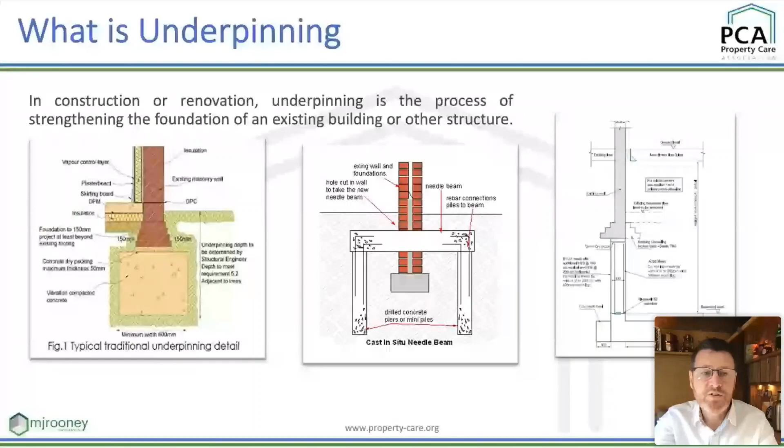So why would you underpin? So we've got building foundations movements or subsidence. Maybe you want to add another story onto a building and you need stronger foundations, forming a basement, of course, which we like to do. Or maybe you're putting a pipe down the side of a building and you're in danger of undermining that structure to get the pipe in. So you might want to underpin that building first of all.

So I got these from Hamilton Fraser. These are really good little images just to explain it. So heave when the ground is pushing upwards. And if you look at the cracking on that photo there, you can see it's wider at the bottom, narrower at the top, and it gives a clear indication of the direction of movement. With landslip as well, you'll normally see a building on a sloping site, and you can kind of see that building moving towards that slope, bigger cracks at the top, smaller at the bottom.

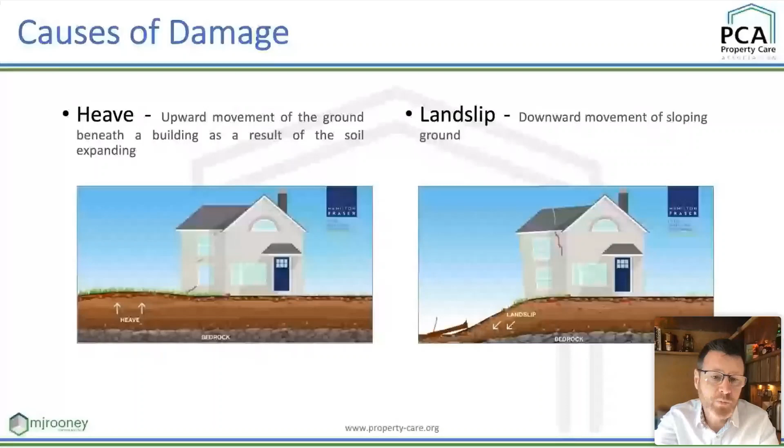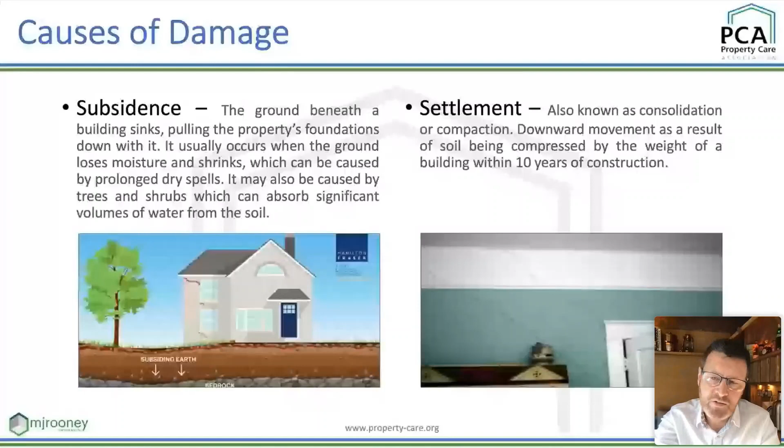Subsidence, as you'll see here, so I think that that tree would have something to do with what's going on in that building, but you wouldn't really see it in the ground itself. And settlement, you would hope you're not underpinning for settlement, so new buildings would always move a little bit, but you'll hope they're designed and built to a good enough quality that you shouldn't see that cracking. Or if it is, it's just minor cracking in the first year within the structure for drying out.

No need to underpin, and just like this one here, this is a lintel failure. It could be coincided with the sort of failures you'd see for subsidence, but if it's just an arch like that, you just need to rebuild it. Certainly no underpinning needed in place.

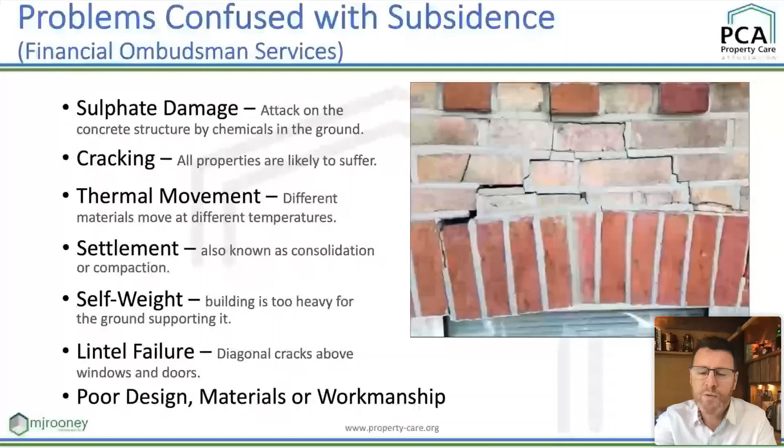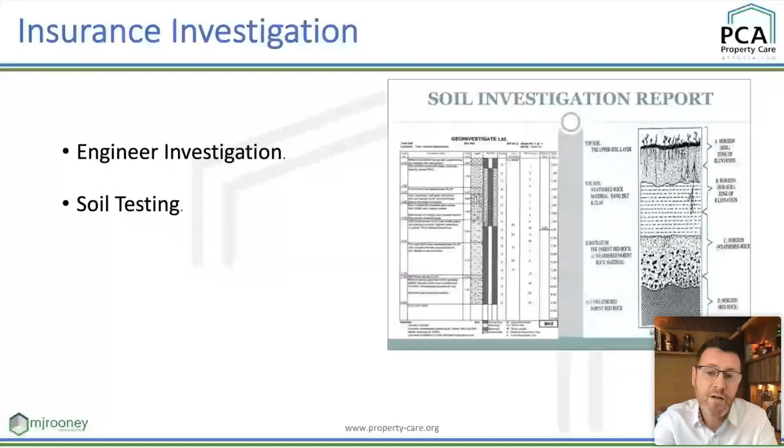So when I was working at Ellis and Buckle, and that became Cunningham Ellis and Buckle while I was there, these are the investigations that we would always be doing. An engineer would have a look first and see, does it look like subsidence, the crack profile. We do soil testing to see the type of soil. Is it clay, highly shrinkable? You might find roots in that, and you'd send them to the lab to know exactly what trees they came from. Arboricultural report to see the trees, what size they are, is there more growth left in them trees?

And drain testing, of course, because in a lot of cases you'll have a look and you've got leaking drains. That can be softening the ground below the foundations, but also washing out the fines out of the subsoil. So maybe if you put a drain liner in there, that's your solution. Certainly not getting into underpinning in that case.

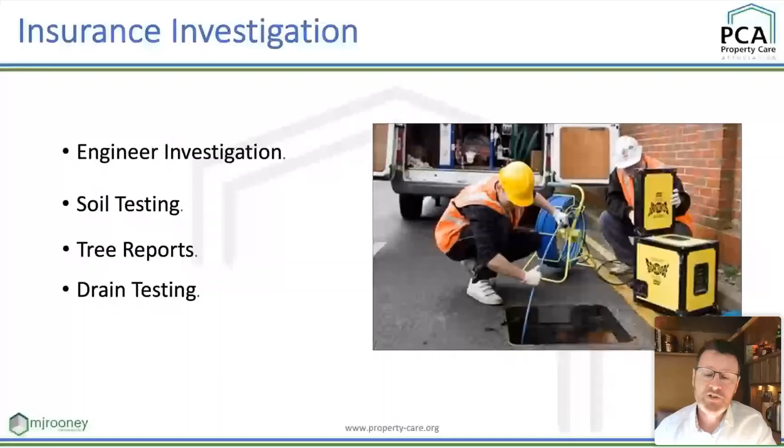Particularly in very long, hot summers, you'll see more damage, more insurance claims coming up in those kind of instances. And then during the wetter seasons, you'll see if you're monitoring the cracks on that building, they'll close during the winter time. And that's a clear indication it's the trees.

So before the invasive weed group get hold of this data and put that on the list, if you just manage those trees, or if you just pick a different type of tree to get you that privacy, maybe wait a little longer, it might be a much more sensible approach.

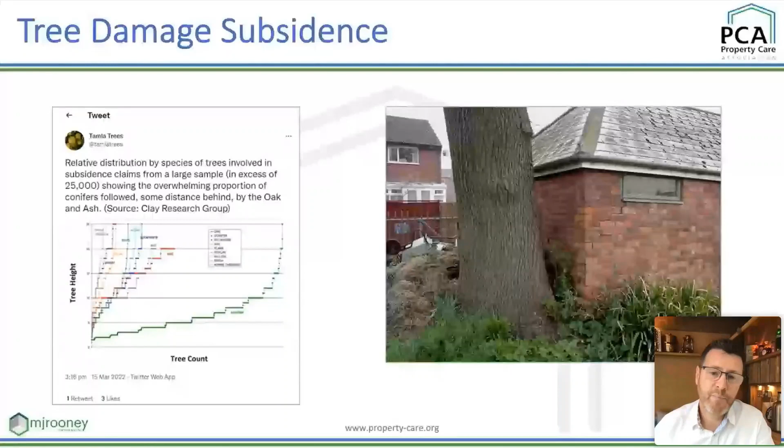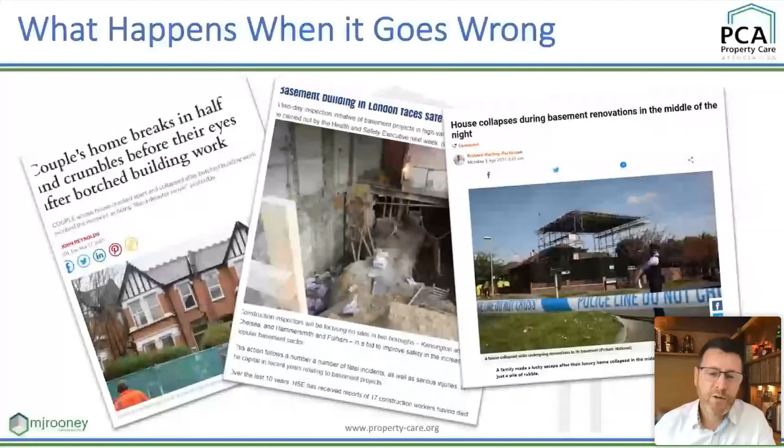And that one on the right, I believe that was not just one house, but two apartments. You've got an upstairs and downstairs. Downstairs want a basement. Upstairs probably didn't want them to build a basement, and the contractor that they selected obviously hasn't done their job right. They had a right to support, a legal right to support, which was gone. But you want to make sure that your contractor has the insurances in place, which I don't believe is the case in this one, just to make sure that you're protected like that.

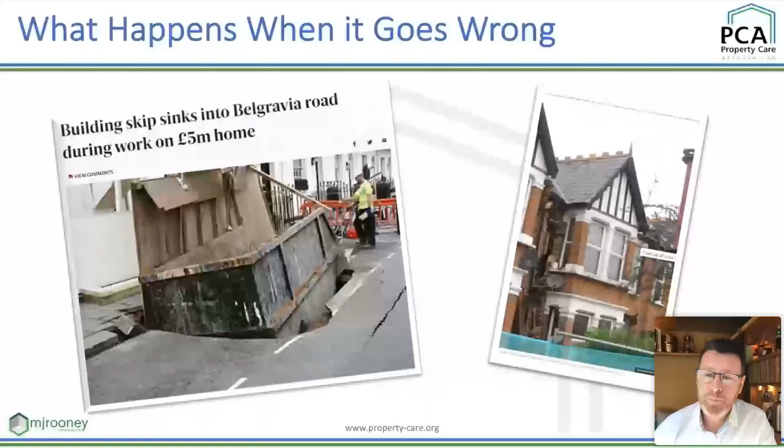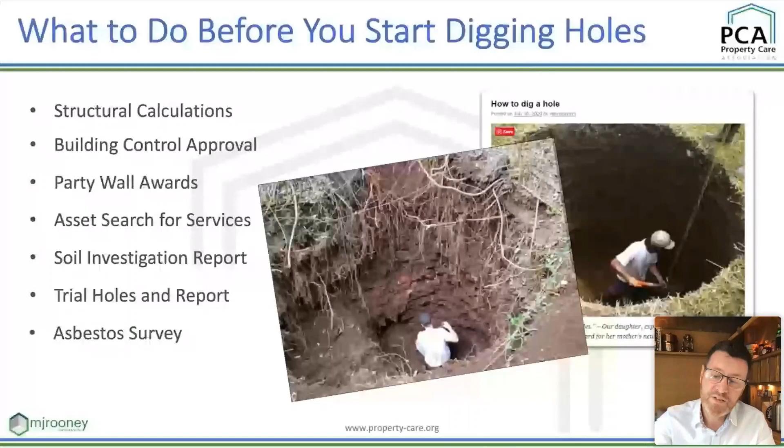Soil investigation reports, of course, trial holes, maybe an asbestos survey for pre-2000 buildings. A structural survey to make sure the underpinning itself is going to be safe to do, that the buildings are okay for that. You've got unexploded ordnance, particularly lots around London, listed structures, archaeology, all the health and safety and temporary works procedures and setting out sequences that we need to do.

Now, that guy that you see there in the picture, obviously all of this health and safety doesn't apply to him because he's in the Congo, but he is part of our supply chain. And I think we've got a responsibility to make sure that the steps that we're putting in place for ourselves over here go into our supply chain, and we may end up just paying more for what we need. But that cobalt, ironically, is to make the tools that we need to do our job safer. It's for our mobile phones, it's for our EVs and stuff like that. So we've just got to keep up our responsibility on that into the future.

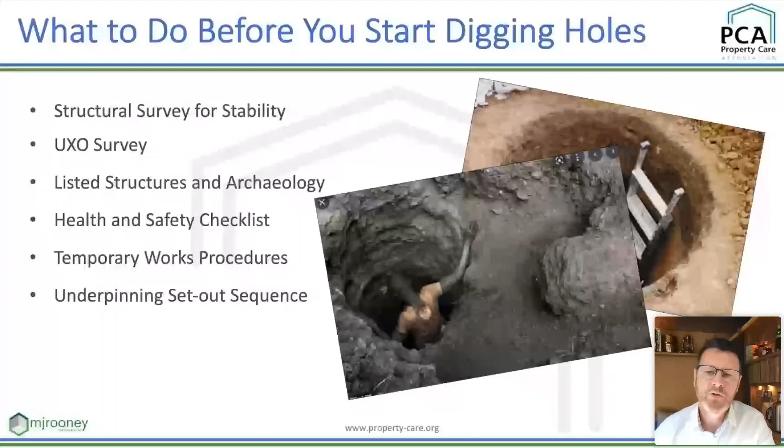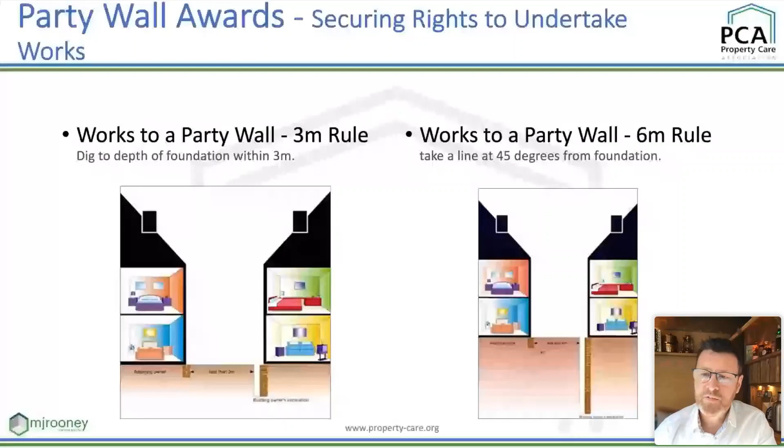But we've seen cases where there's blocks of flats and they're all under individual ownership. So you could have 40 party wall awards. Is that 40 party wall surveyors? I suggest that that surveyor is working on behalf of the wall and not for either party. So if they're doing their job right, you should only really need one party wall surveyor, I think, in most cases.

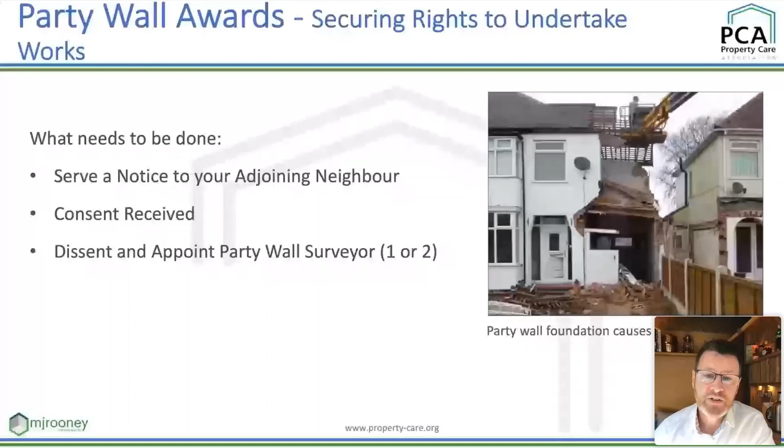So we send a signal down through the services and we'll locate them on site. So the first thing we want to do is a hand dig. Find them services, log them in a couple of locations so we've got a reasonable idea of where they're going, and keep up that checking as we're going through that process.

Another thing to note is doing trial holes. Some jobs go ahead and we don't have the information on the trial holes. I think it's awkward to go into someone's house while they're living there and dig holes, but it really is worthwhile. Certainly lots of holes, one on each elevation, I think is advisable.

We've come across jobs before where you start to do the underpinning works to form a basement or something and you find out the foundations are completely different. So the engineer needs to revisit their scheme. We need to revisit the temporary works, and you need to go back to that party wall award. So you can get huge delays that would come out of that. So as much information gathering as you can right from the beginning.

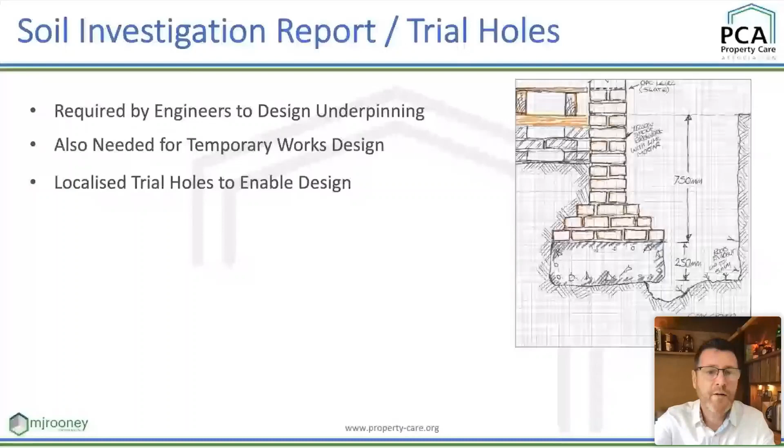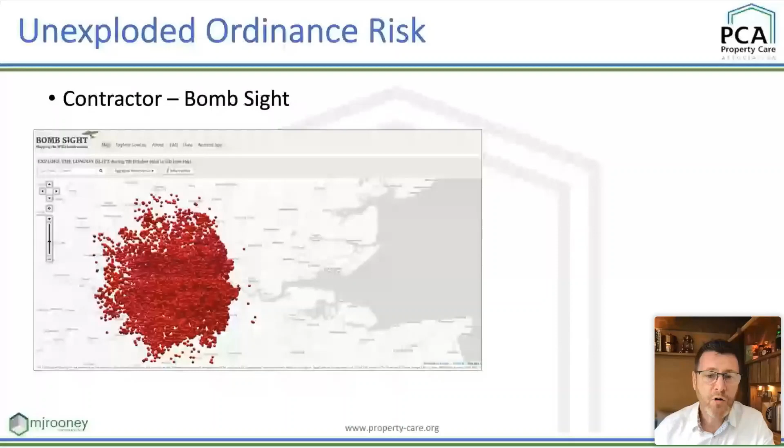Right, bomb sight. This is a really good website that you can go to. So there are all the bombs that landed around London in the Blitz. That's just by our office, and I can see about 4 or 5 in the vicinity of where we are. So if I was looking at an underpinning project or a basement build, I would check that website.

Now, if I'm very close to one of them bombs, then there's a good chance that other bombs fell nearby, maybe that didn't explode. Or even if it was very close to that, there would be quite a risk of contamination in that soil. So you might do a little bit of extra testing on that. Quite often, if you get a soil investigation report, there'll be a desktop study that's done with that. So that might identify the risk of unexploded ordnance in the ground.

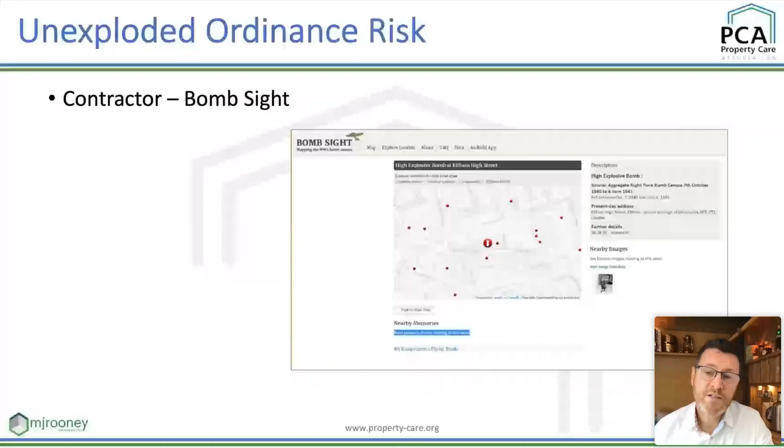And they would just be on site while we're digging. They would just be drinking tea and walking around. But believe me, if you did find one of those devices, we would all be gone and they would be left to deal with that. So it's just all about reducing risk as much as possible. We've never dug up any bombs, by the way, but you do see it in the news.

So a note on listed buildings and archaeology. It's worth checking if a building's listed, but also if you're next door to a listed building, because that can be just the same. And you'll need listed building consent if you want to underpin those buildings. And just to note that if you just say, well, I didn't know, it's not an excuse. You cannot use that as your defence. So you will be committing a criminal offence by doing those underpinning works in that case.

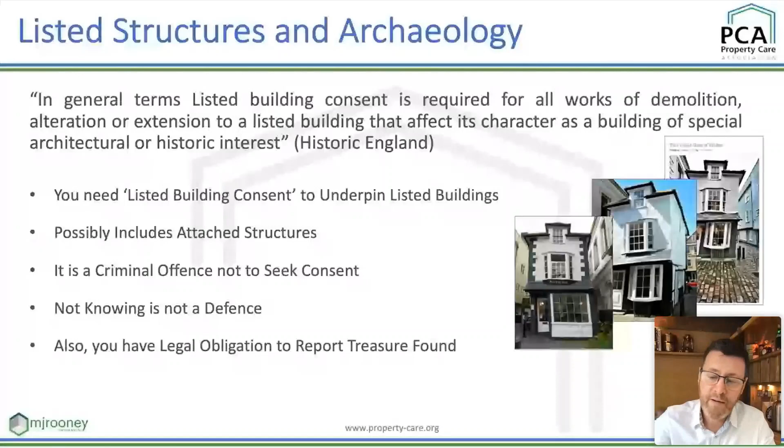Also to note, for treasure that's found or any archaeology, you've got an obligation to report that as well. Now, when I was digging pins years ago, I used to dig up lots of stuff, lots of bottles, particularly when it was around rivers and you had lots of gravels. So we'd find old pipes and stuff like that. Nothing of any real value. I've not heard of anything really reported to me since. No one's come to me and told me they found a box of gold or anything like that, but there is an obligation to report that.

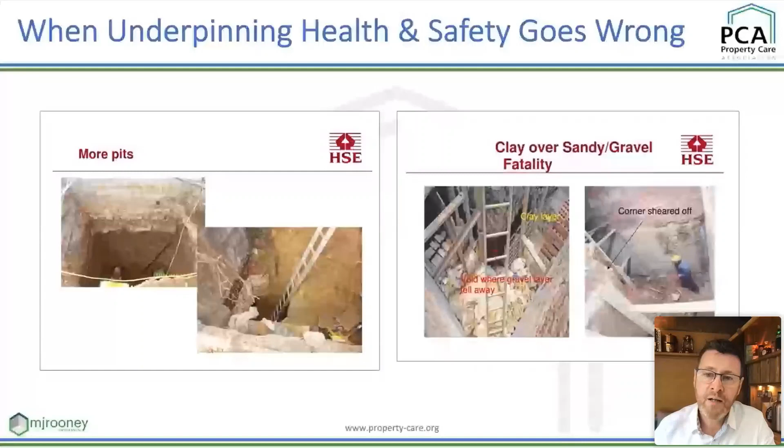So this is the sad side of what we see. If you have a look on the right there, look at that shoring that's in place for that underpinning. And that was a fatality on that site. This data was from the HSE, another fatality site that you see there.

So some people are going to work and they're just hugely let down by their employers, which is just really sad to see and something that we can definitely avoid. That one on the right there, this is the type of thing that can go on.

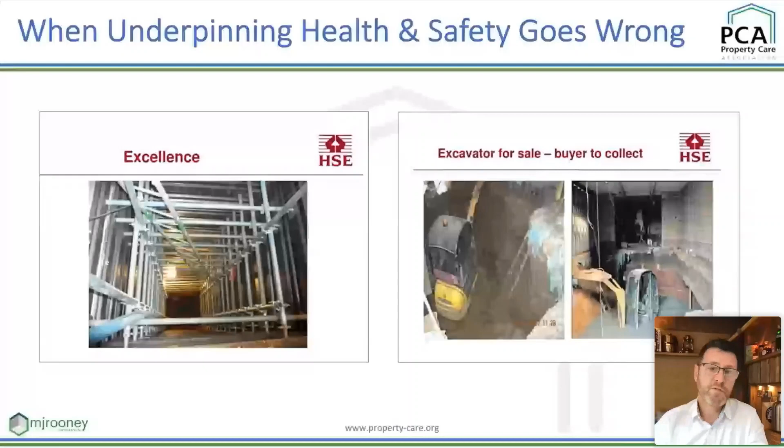So health and safety is everything, obviously, for what we do. So we get some checklists together. We've got to have our method statements and our risk assessments in place. We would have a checklist that has to be compiled at the start of every shaft and every part of works. Strong confined spaces procedures, because we're in those confined spaces, rescue situations, and we would need to have the calculations for all of them temporary works on site.

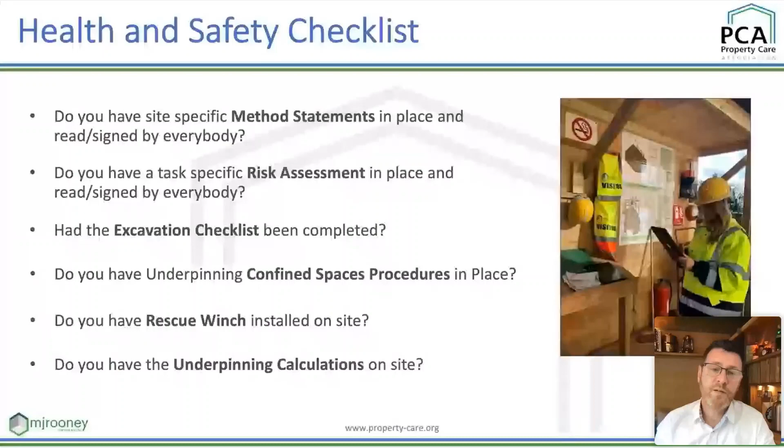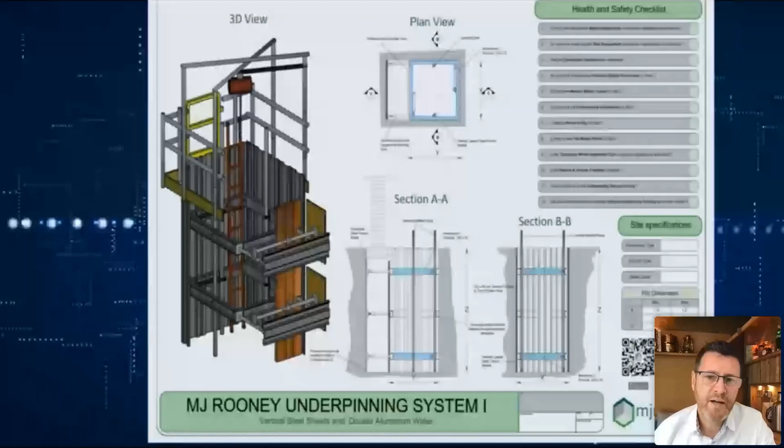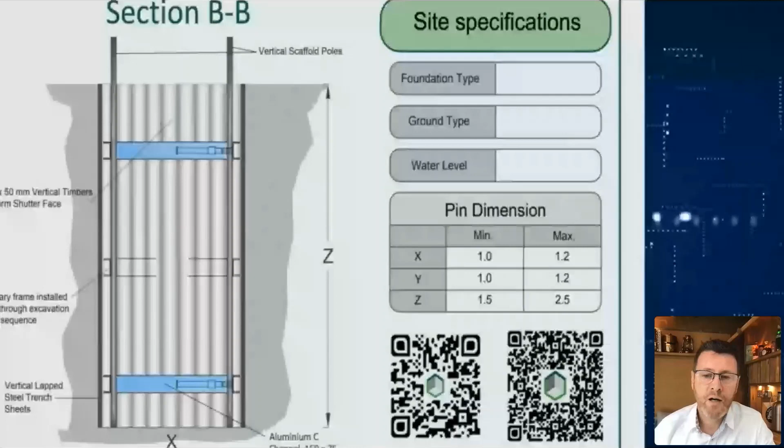So here are the type of underpinning drawings that we have. So we're showing in 3D so that everyone can visualize exactly what it is. We've got the plans, the sections, we've got the dimensions and ground types, but we've also got this health and safety checklist. You need to tick every one of them boxes off on the right hand side before you can break the ground, start excavation. And we've got QR codes which take you to a virtual reality environment, augmented reality environments to see these underpinning systems.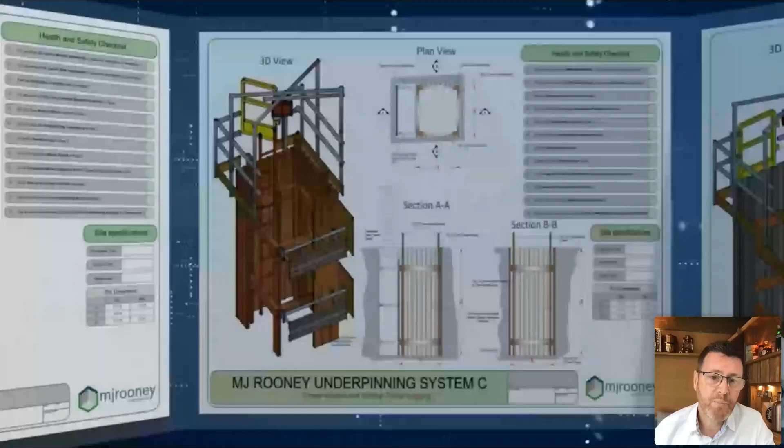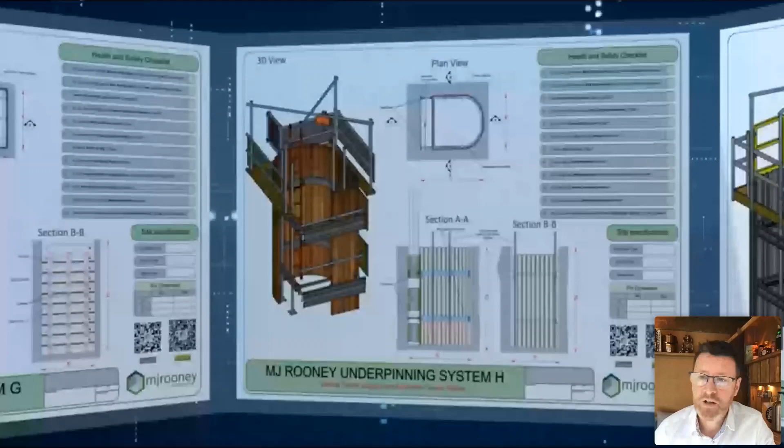So the first one has no earthwork supports in it, just get the concrete in there quickly. We've got just some ply lining for shallow pins again. We've got a timber system for shallow underpin shafts. Now we're moving into steel sheets when we get a bit deeper. We've got steel sheets with steel whaler frames, and you can do double or triple frames depending on where you're going. And then we've got our deep shaft systems, and we've got some innovations that we're looking at for rounding shafts off because it's quite an efficient shape. Systems like that would be for very firm ground.

So lots of different systems in place, but just because we've got a standardization in the types of systems that we've got doesn't mean that you can get away without having a full set of calculations for that exact building, for that exact ground condition. So we need full temporary works design on every job.

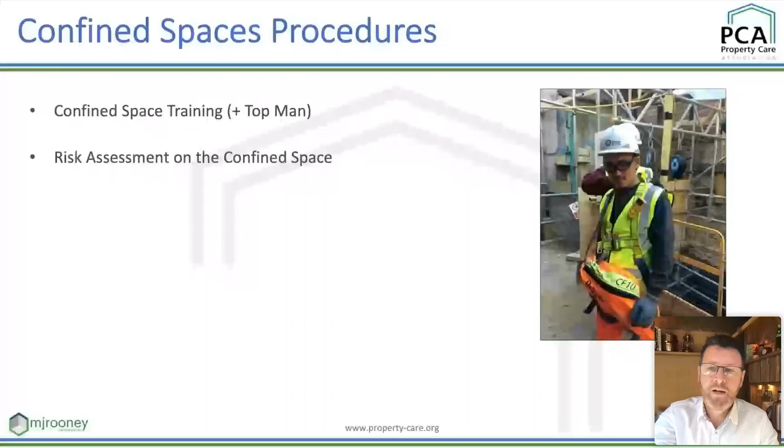So confined spaces training, really important in what we're doing. So risk assessments, looking at the hazards, and you would have a top man in place up on top. He would have rescue breathing apparatus with a little bit more air in it. And what you can see Gigi wearing there, he's got a gas monitor on his lapel. We would tie that to a bit of string and dip the shaft before you get in.

Then when he gets down there, he doesn't have to wear all that gear while he's doing the excavation works. Of course, they would be on the side, just nearby. And when we get down into deep underpins, we keep the harnesses on. And just over his shoulder there, you can see the rescue winch. That is a manual rescue winch.

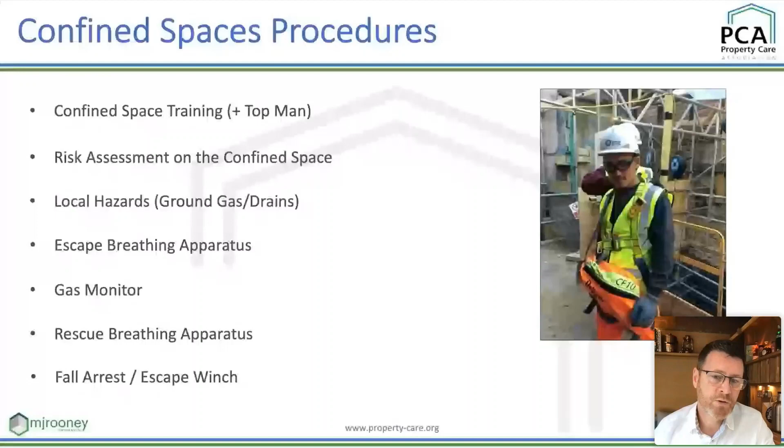We would have an electric winch that's in place, but in terms of if there was a power cut, you would use the manual winch to make that escape. Because there's lots of things that can go wrong in them shafts. You can have pipes that you cut through, and there may seem that there's no water coming into them. And then you get a good storm, and your shaft could fill up with water. You could have low oxygen levels, ground gases in that shaft as well. So lots of risks. With all these procedures in place, we can mitigate them quite well.

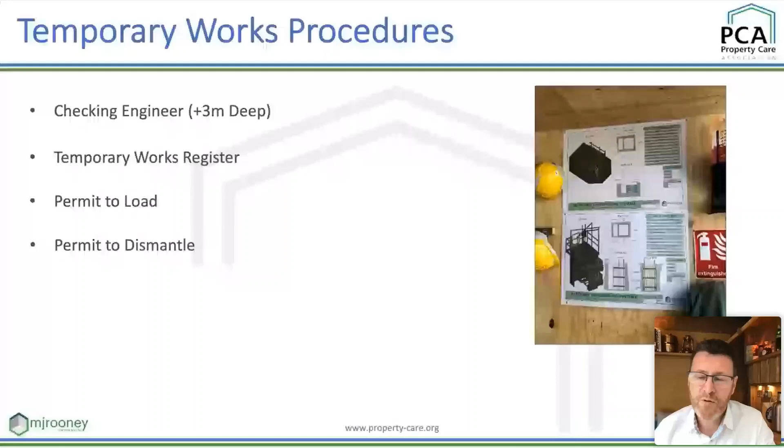So our temporary works procedures must be to BS 5975. We would have a temporary works coordinator and a temporary works supervisor fully trained on every job. Now that's a 2-day course and a 1-day course, but really it's your expertise in your field that is the most important thing. And these courses just really tip you off with the procedures that you need to be following. So if we're getting into deeper shafts, the guidance would say that if you're more than 3 meters deep in a shaft excavation, you'll have a checking engineer.

And then we'd have a temporary works register with every single item of temporary works on that project written on it, showing the calculations. Do we need drawings? Who is the temporary works engineer? Who's taking responsibility under their PI for it? And remembering that permit to load, but also permit to dismantle and a sequence to dismantle, because sometimes that can be the most dangerous bit, is getting out of these excavations and getting back out above ground, and filling in those holes and taking out that earthwork supports.

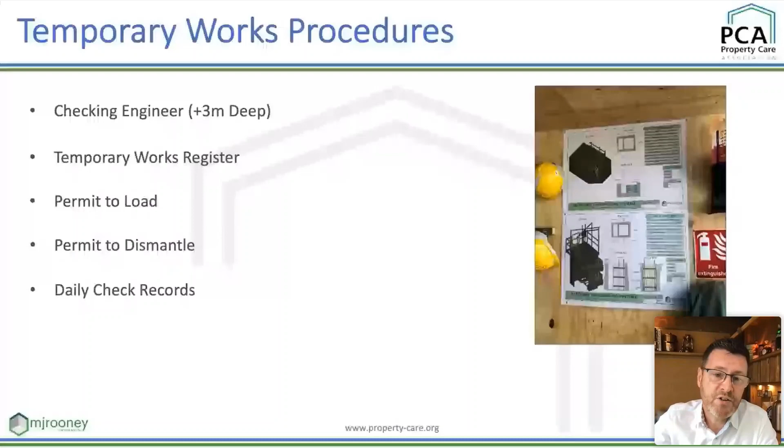So we would have daily records. Them records would be digitalized, and we would have them back at our office so we can make sure that all of these procedures are being followed. So what happens when it goes wrong? There is a person in that shaft there, so I'll just leave that up briefly, but you can see the brickwork fell away. So how about putting in a concrete ring beam around that whole structure there in the first place before you start underpinning the shafts?

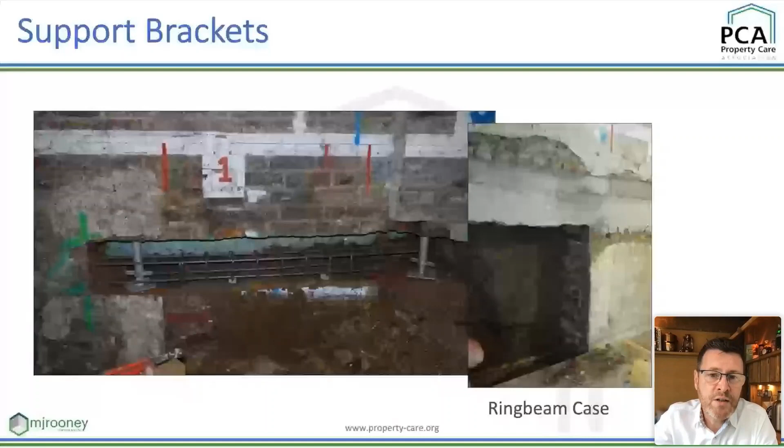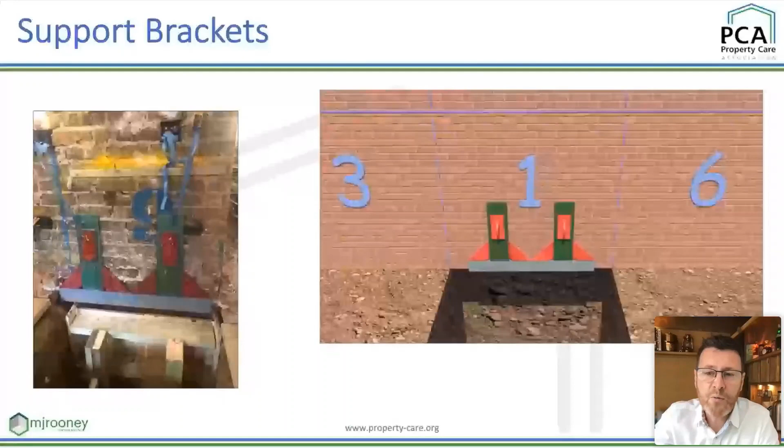We've got some different, this is a steel beam just to hold brickwork in place. And this is a system that we like to use a lot. So we've designed this in-house. We got a team together with the people that are on site, and we just wanted a quick and easy way of supporting. It's only a small bit of brickwork that you're looking at supporting, and it doesn't fall that often, but how often is acceptable? If it falls 1 in every 10,000 times, clearly it's not acceptable if you're in that shaft and you're doing the underpinning. So that gives us a lot of security overhead while we're doing them works.

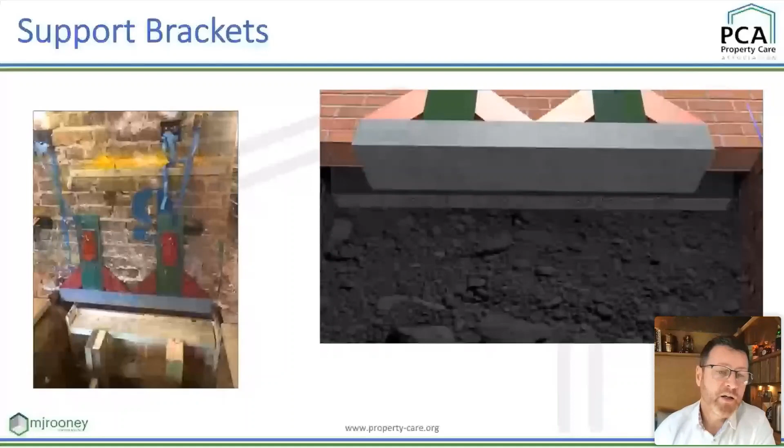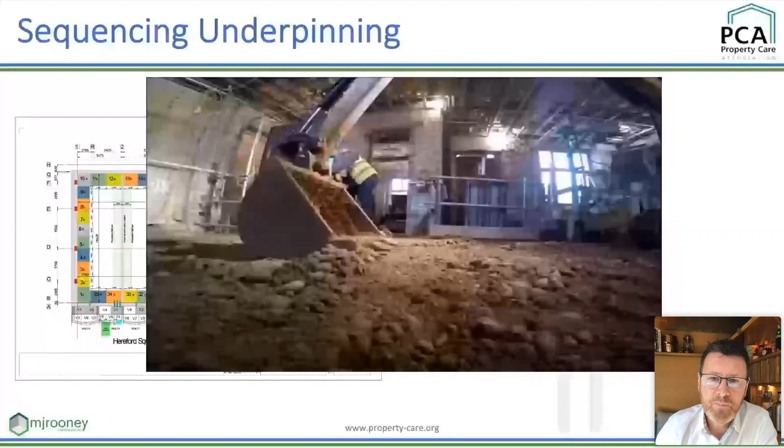So you can see the guys here underpinning, that's between 2 pins that we've completed already. So a lot of propping horizontal. You can see the sheet there on the wall from the previous bit of support. But it's great. This one was for a wine cellar that somebody wanted beneath the lobby of their house. And you can really make some amazing structures below ground. It's just important that we follow procedures and do that safely.

So one thing to note here, trade association membership. If you're getting somebody to do underpinning works, if you get a PCA member in from a very early stage, then you've got somebody that can manage the waterproofing. You've got a whole load more options in your waterproofing design right from the outset, rather than waiting until you've finished building that structure. But definitely to mention getting ASUC members in to do your underpinning work. So the Association of Specialist Underpinning Contractors.

And because of that, you can be guaranteed that they've been audited very heavily. So new members would have a look at their corporate standing, their identity, to make sure that there's no criminal backgrounds in there. Everybody gets a technical, health and safety and an insurance check. And that company will be checked to make sure that they've got enough finances to do the projects that are underway.

So there's also a contractor assessment scheme that could be every year. If somebody is shown very low risk and their procedures are exceptional, maybe that would go out to every 2 years. But they would be checked, and you don't know when them checks are coming ahead. You give a list of sites, you get a random inspection on your site.

They would come to our offices, go through all of our procedures, and that's not just the health and safety, but it's the attitudes, it's the management, it's equality in the company, our quality procedures, how we communicate. It's a very thorough check, and it gives peace of mind, I think, to anybody who's looking to get basements or underpinning works done, to know that a lot of that assessment has been done on that contractor already.

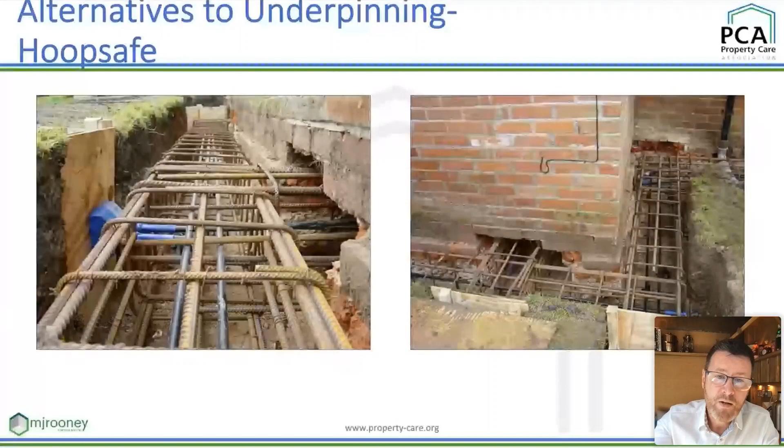My thesis didn't come around. I said it should have replaced underpinning in lots of places. The last articles I can find are kind of 2000, 2004. So it never came about, apparently.

Another alternative is injecting the ground. So this photo here is from GeoBear. I don't know much about this. I'm just aware of what it is. I've seen some really good videos. So you've got jet grouting and geopolymer injection. They can put expansive forces into the ground. So I've seen slabs that have dropped, and they actually inject underneath and raise them slabs back up to the level where they were, raising up corners of foundations like this.

But there's just so much beyond my understanding. If you've got desiccated ground, and you inject it, let's say you've got heave back into that. Now, talking to them recently, they say they've got lots of studies into all of that. So I just think it's worth consideration in a lot of places. There's huge cost savings, but I understand engineers wanting to give a definite solution. And if you dig holes and fill them with concrete, you can be guaranteed what you're providing. You can see the ground. You can see there's no roots down there that might damage the building further. So definitely one for more consideration, I think.

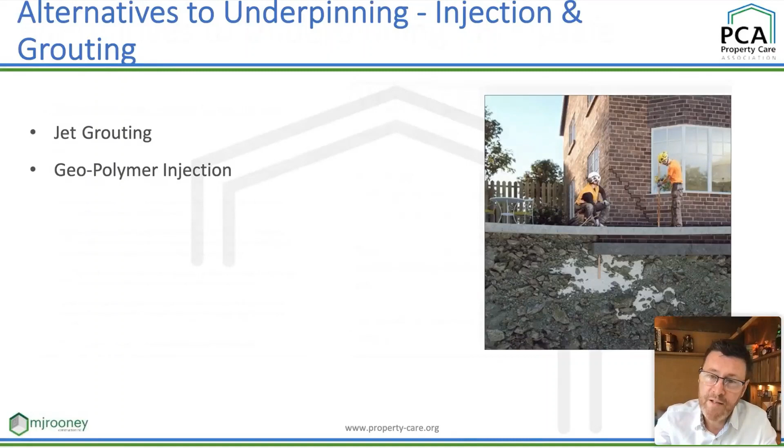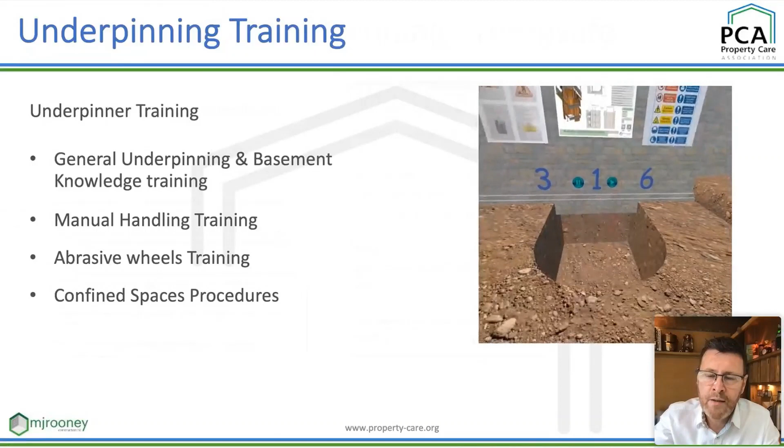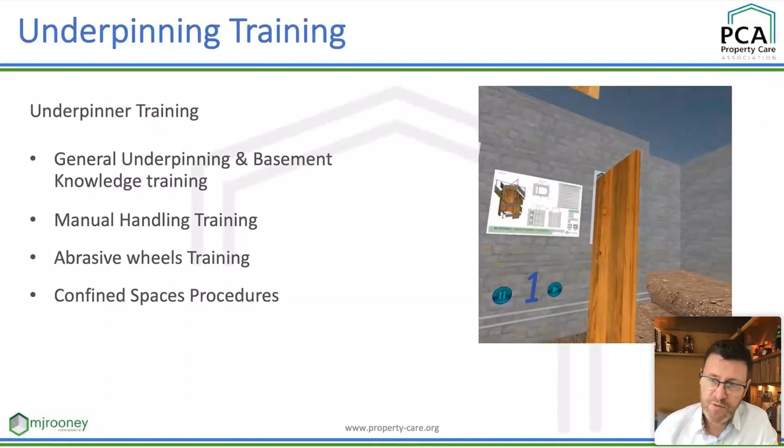This is an experimental system that we were working towards, just on the idea that the most efficient shape that you can dig a hole is round, because it self-supports to a certain extent, and the earthwork supports are doing a little bit less work than they are in a square shaft.

We've got lots of other training that we need to put in place as well. You've seen confined spaces, abrasive wheels, manual handling, lots of different training, as well as your general knowledge on the buildings. And you must appreciate that if you look at an IKEA catalogue, or IKEA instructions, they did away with all words, and it was just one set of instructions that can go to any nation. This is the same as that, even much better.

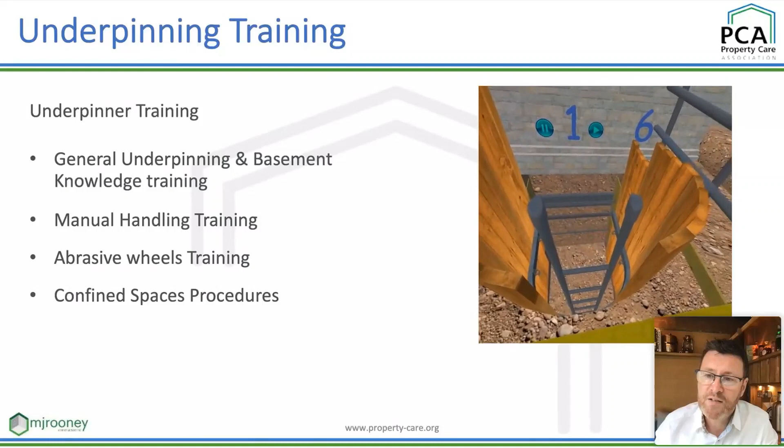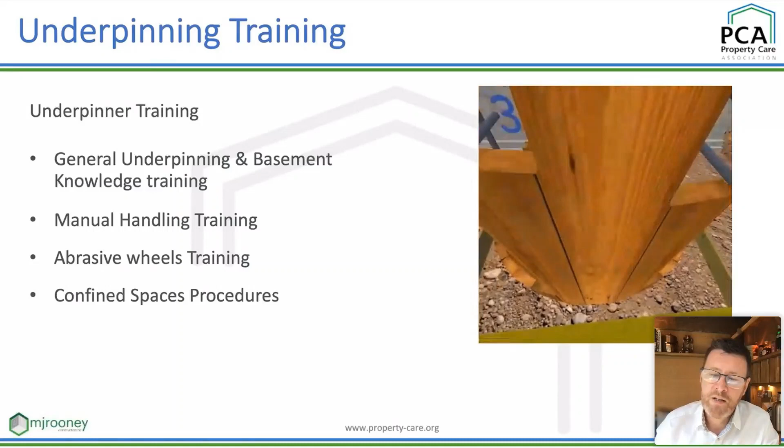It's because obviously it's three-dimensional. You can move around that space. If you tilt your head forward with the headset, you can drop down into that shaft and have a look around. So yeah, it's a really good way of providing this kind of training.

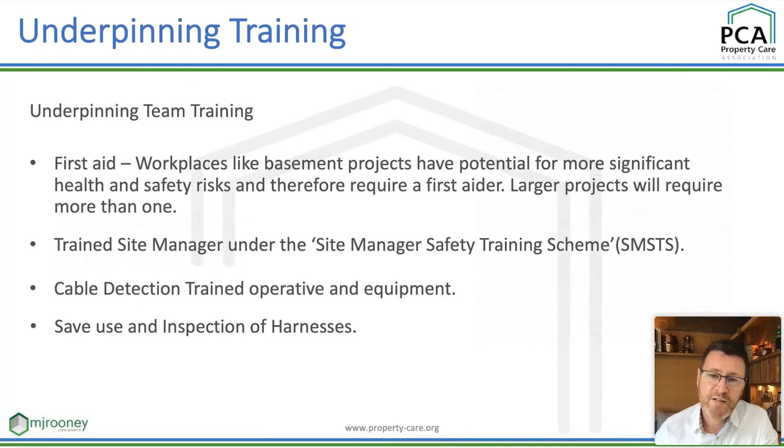We also need to make sure that we've always got first aiders on site, that we've got a site manager on site that knows underpinning, but also has their site management training, SMSTS, cable detection, inspecting harnesses. These are all in our checklists of things. But if we put an ad in and we're looking for underpinners and we write down our minimum requirements, which would be kind of minimum health and safety, nobody's going to reply to that ad, because we just don't have the people out there with the training that we need.

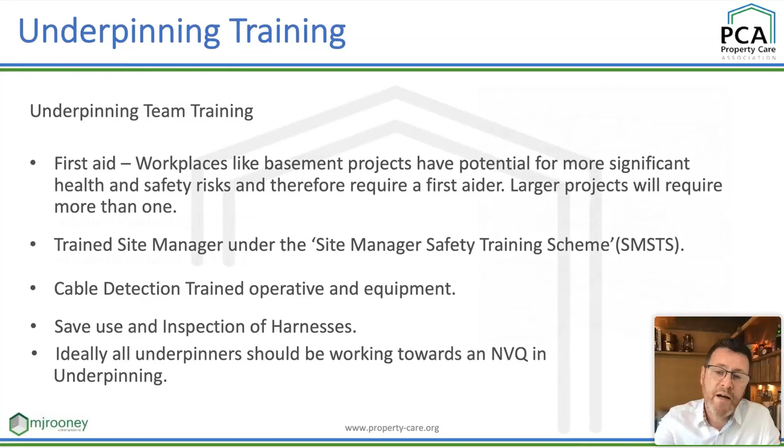And when ASUC come in to inspect our sites, they will go up to the people that are digging the shafts, and they would like to see their NVQ specifically in underpinning, if that's what they're doing at the time. So we go through a period of training. When we get new people on, we're looking to train them up, get them booked in on the courses as quickly as we can and bring them up. But we are training for the industry. It would be nice to see that the people specifying underpinning put that in as a requirement, and you would see a big uptick in training across the board.

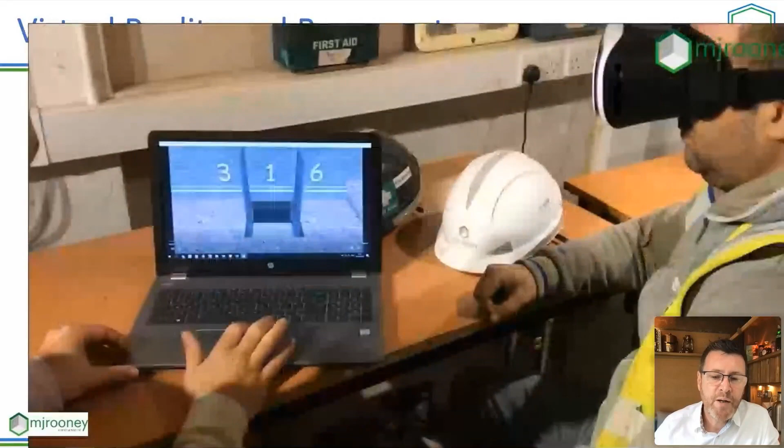Here you can see one of our directors, Oscar. He's delivering that training on site. You've got to remember, a lot of the people that come to dig holes, English is not going to be their first language. We've got lots of people who are technically absolutely excellent, very, very clever, highly skilled people, but struggle with the English language. And I suspect that they would be doing something else if they had good language. So we've got to find a way of providing that training and communicating, which we do. And this kind of system helps a lot.

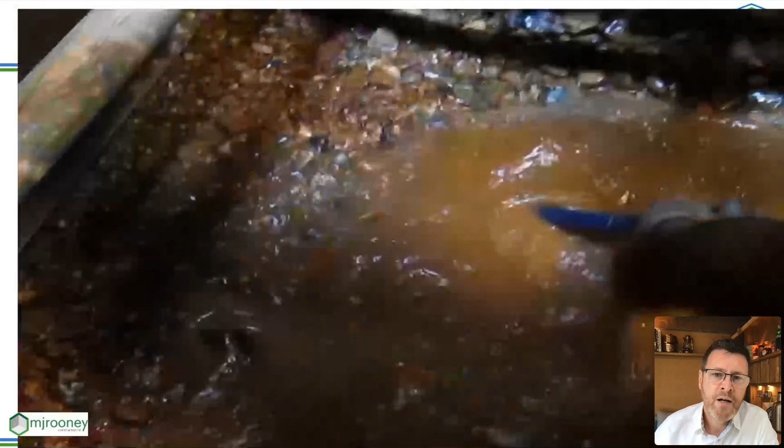If we kept going there, and if we kept pumping, you can imagine, it's just a 2 meter square hole. But really, it's like you're in a lake, and if you put 2 or 3 pumps in that, you will just keep pumping and pumping, and it takes a while for the water levels to go down. You'll be taking all the fines away from them buildings that are in the vicinity. So you've got potential to cause huge amounts of damage. And thankfully, in this case, they redesigned. They took us up just about another 4 inches higher, which took us out of that water and mitigated a lot of risk on that job, and of course brought some cost savings along with it.

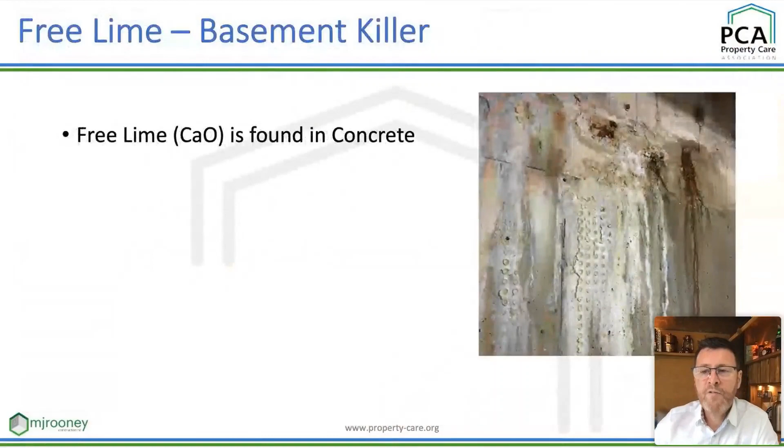Free lime is one worth talking about, particularly in the dry pack between underpinning and what's above. Thank you to Delta for these images that they sent to us, and to Newton as well for this particular image, which really shows the damage that can happen. So when you're making your cement for the concrete, you've got lots of calcium oxide in that. That's free lime. And then that will dissolve in water to give you calcium hydroxide. So when that comes out in that water, it's run across the concrete. It will then react with atmospheric CO2, and what you've got left is insoluble calcium carbonate.

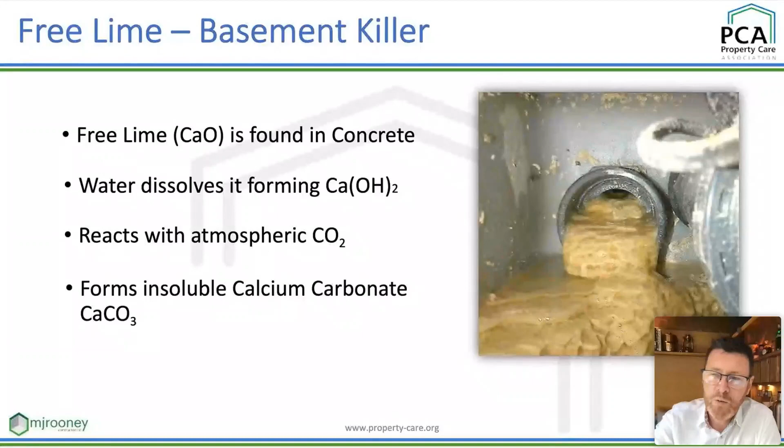And I can tell you that's free lime, and that's what will choke a basement up. And particularly, it will come through the dry pack. And if you hit that with a claw hammer, it just bounces right off it, and it doesn't even leave a mark on it. It's very, very hard stuff. So what we do to stop that is we want to flush back the dry pack a little bit and put waterproofing in front of it, and we want to put an anti-liming agent across all them concrete surfaces.

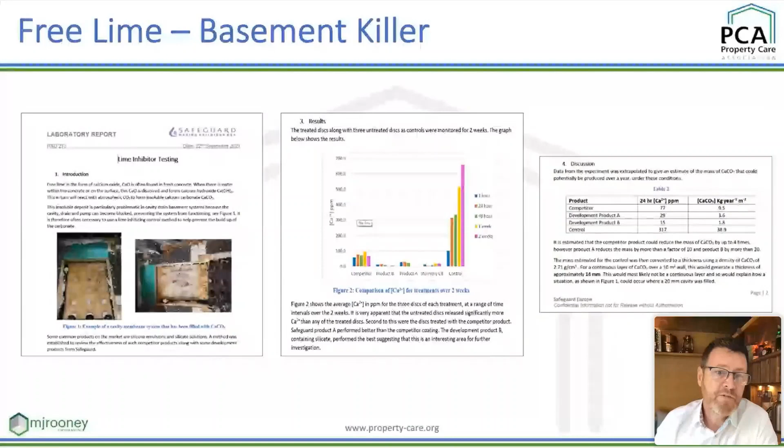Now, I'd be talking to the likes of Hudson Lambert from Safeguard, and I talk about the practical world, and he's very much in a scientific world and fully understands what's going on. And he shared this study that he did. So you can see on the left what's happening. That's a cavity drainage membrane that's been completely choked up by free lime.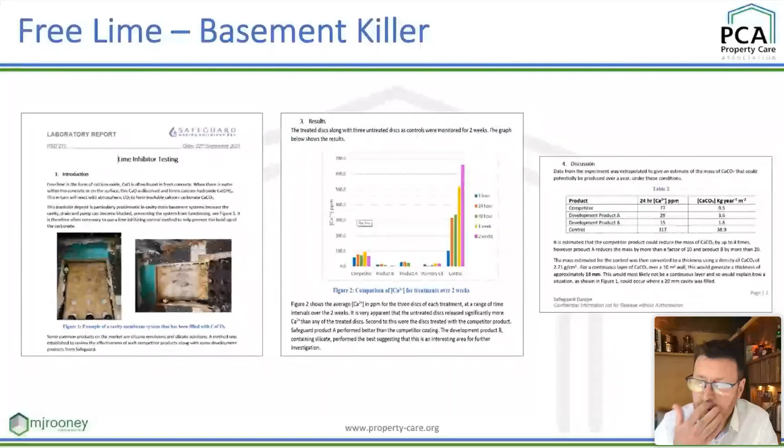And they made discs, and they coated these discs with anti-liming mixture. And you can see on the right-hand side how much free lime is coming out of the control sample without that. And they're testing a various number of products. But the study on the side, what they did is they extrapolated that, and they worked out how would that work over a 10 meter square section of wall over a period of a year, and they calculated that that would add to 16 millimeters of free lime build-up. So that's pretty much choked out your waterproofing membranes.

It's a reason that I think if you're designing underpinning, you should put a channel on the outside of that. So 100 mil wide, 50 mil deep. So that will collect, we put in a void former into that, and that would collect all that CaCO3, and it would give you a long period of life for that building.

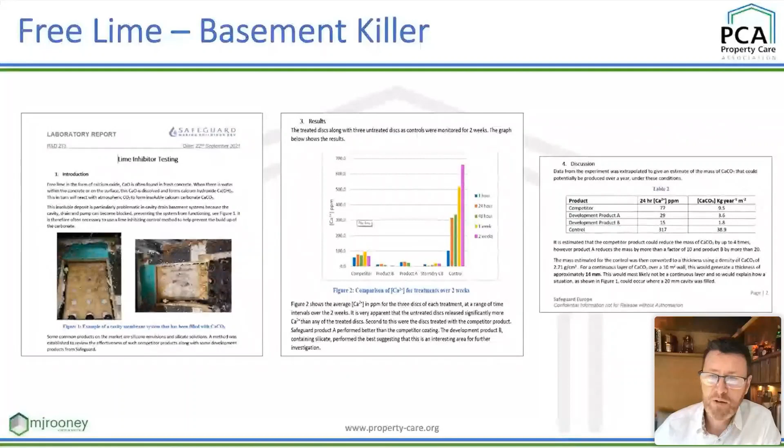What I don't agree with is allowing that water to run down the wall and then across a slab to a section of pipes underneath that slab, because I think you're asking for any potential moisture. There shouldn't be any water in there, but in the event that someone hasn't done their job right with that anti-liming agent, it's completely clear. You can't really see that it's been put on the walls. Maybe some colorant should be put into them, actually. It might be a good idea just to see it's done. But it's just about reducing risk in design as much as possible.

So some advice on selecting an underpinning contractor. If you're looking to do underpinning works and you're specifying for a client, or if it's in your own place, have a look at their insurance. Make sure it says that they can do underpinning works and the depth, and they're covered for that. Make sure they've got a proven track record, lots and lots of projects and photos they can show you. Get some references. Make sure there's a qualified temporary works engineer with PI cover on the job. Look into other insurance as well, like non-negligent insurance, because the contractor really is insured for their negligence only.

Look at the RAMs and read them, and make sure what they do is following them, risk assessments and method statements. You would have a temporary works coordinator, look at their certificates. Temporary works is a really important part of what we're doing. A builder that can monitor that building for movements would be good. Party wall awards, you want a contractor that can put a whole comprehensive document together to make that party wall surveyor sign those works off. So like sequence of works and things like that.

You want a copy of all staff training, testing that they want to do on the materials for the concrete. If there's site batching of concrete, then you would need a lot of testing in place of cube samples. If you pick an ASUC member, then you've got a lot of peace of mind. But if they don't have that, then an external health and safety inspection is worthwhile getting in place, like CHAS or Constructionline. Make sure an F10 is in place. I think if there's more than 5 or 6 pins, it's going to be applicable that you let the HSE know that you're doing those works, and just that they're capable of working in that principal contractor role.

So let's have a look at some case studies on types of underpinning systems that we have and do. So maybe starting with some shallow underpinning. So this is a grade 2 listed building that we're putting underpinning works in. I think we had some ply lining in that, but in general with shallow underpinning like that, you wouldn't really need any earthwork supports, just some supports to the structure as per the temporary works engineer.

Now, because that photo had that membrane in place, and some people might be a little bit confused by some of that, it's because this was a grade 2 listed building. We had discussions with historical building consultants. They wanted that slab to breathe. They were allowing some membranes on the walls because this had Newtonite, which is old waterproofing, bitumen waterproofing going back really 100 years or more. So that would have a glasscrete aggregate down there.

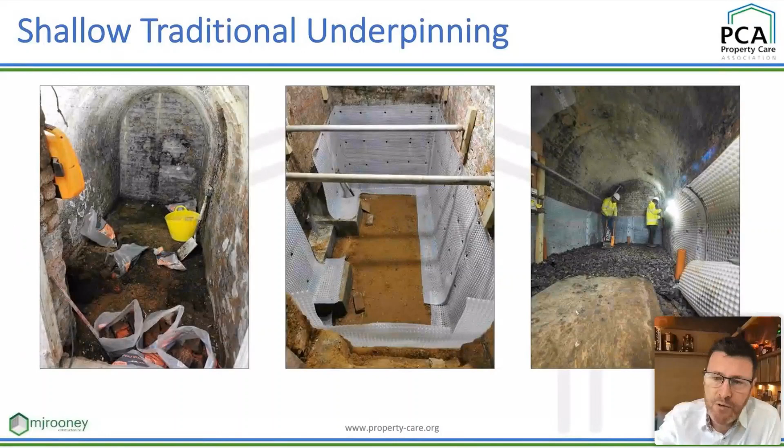We would just put a hessian material over the top of that and a limecrete slab as well. We've got a drainage layer underneath that. So that was an acceptable solution, and it would just have a certain amount of caveat from our part. This would be a medium-sized underpinning that we're looking at here.

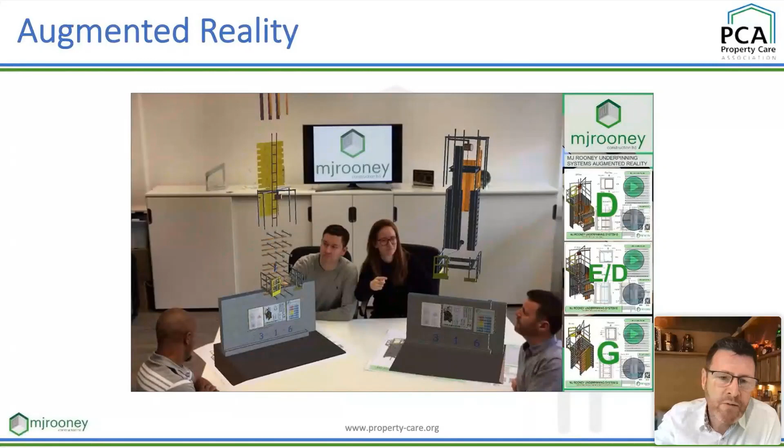This is how we're using augmented reality. So we're not actually in the room with them models there, but this is not photoshopped either. So this is a view through an iPad, and therefore the iPad detects the drawing and would show the underpinning systems coming up from there. So it's another really useful tool. So when you hand your drawings, just view it through your phone or an iPad, through our own app or just general augmented reality apps, and you can actually walk around and see exactly the design. It's much better than just 2D on paper.

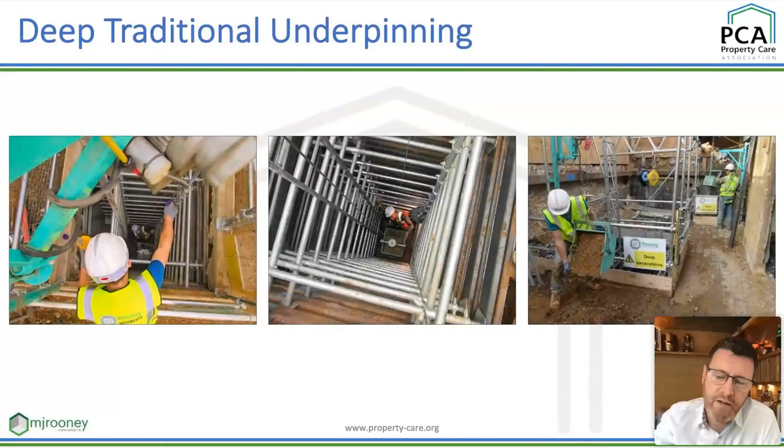This was another job that we had in central London. This is double-storey basements. So these are hand-dug shafts. We can do these down to about 10 metres. If you want to go further than that, then you would dig a much wider shaft in the first place to begin with, and then step back inside that and do another excavation below. This is where there's no room for piling or other options like that you might want to do. So have a look at this one as well.

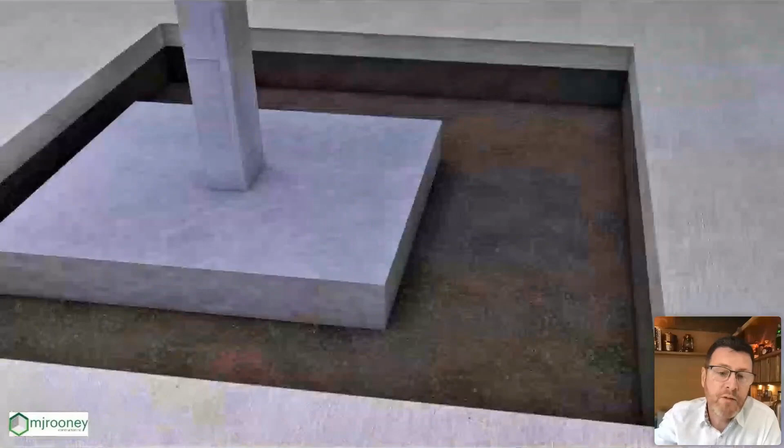This was quite a challenging project. This is about how to underpin a reinforced concrete frame building. So you can see we've got 2 metre by 2 metre mass concrete foundations. So the way that we did this was piling to either side of that, pouring a ground beam with reinforcement cages each side. We build a support structure up over the top of that to support into that column. And therefore we can smash out that foundation, and we've re-supported to the sides.

That allows us to put a couple of steel beams in there coming across, which get encased in concrete, and we extend our steel structure that you see on the side and the concrete. So we're actually extending them columns down, and as you can see, it gave the head height that we needed within that building to change that from what was just like a garage space into new apartment space.

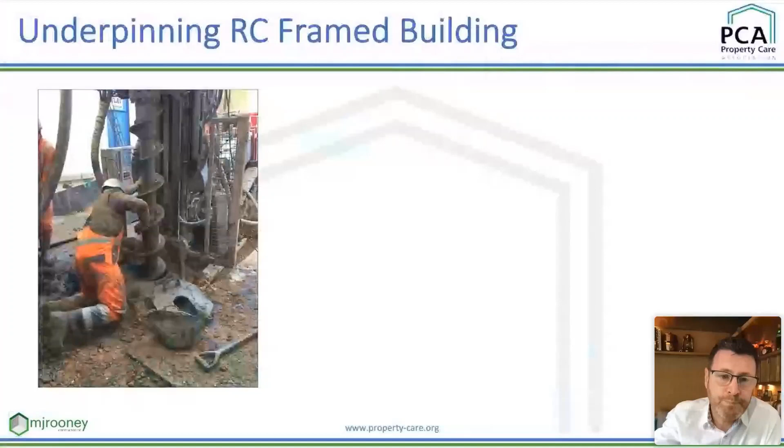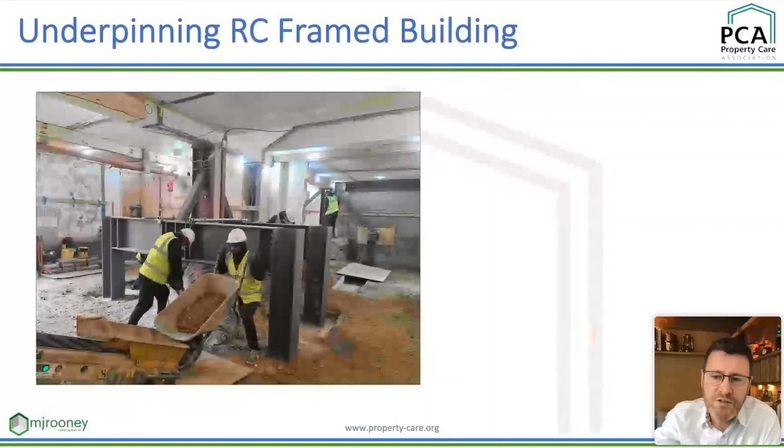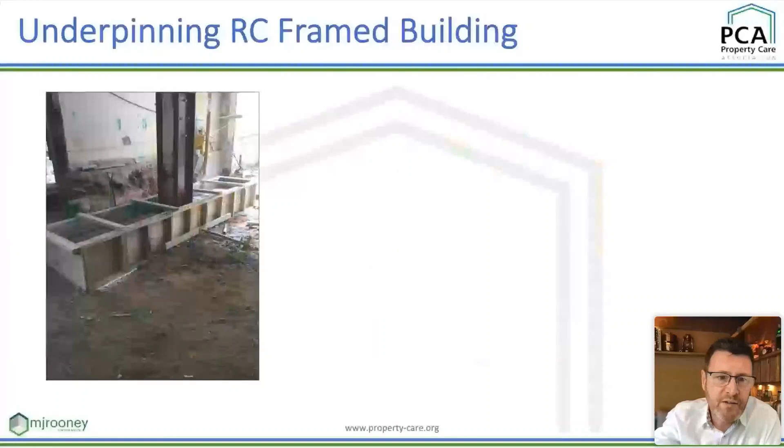So here you can see the actual job going ahead. There's the pilers piling away, the ground beams going into place, our steel structure going in each side. Now we're demolishing out them foundations, and we were using Dexpan to break a lot of that away quietly in the evenings. You can see the beams going in there now, wrapping mesh going around them beams, and the extended columns coming down. And then, of course, wrapping those in concrete at a lower level.

And that gave just that bit of additional headroom that was needed to make that a more workable space for the apartments that were going into it. And this is the temporary works, the complex steel structures that were going in place to make that go ahead.

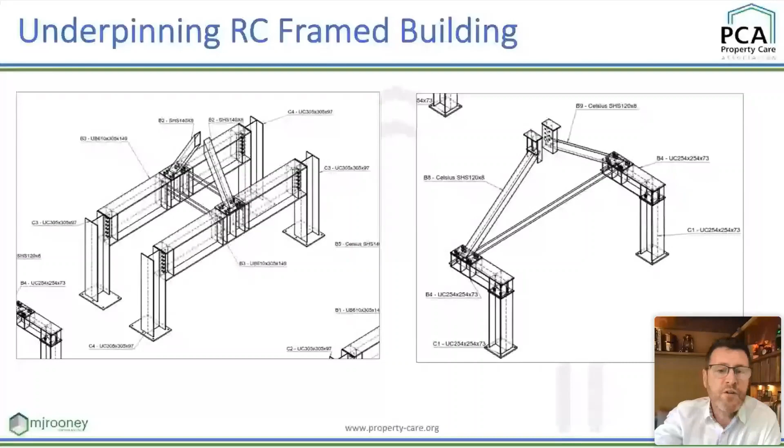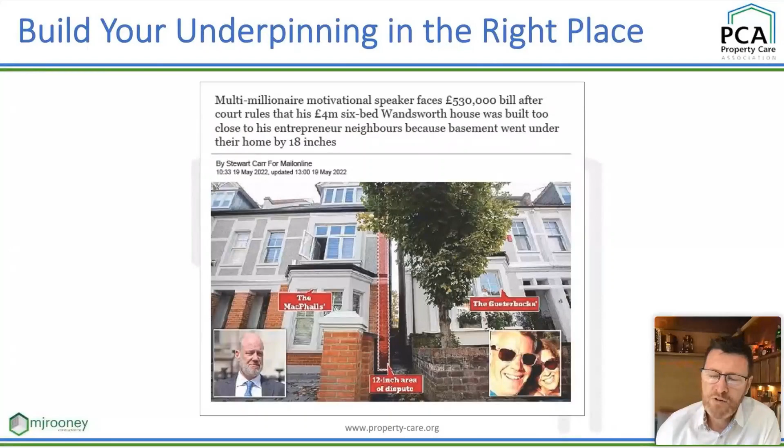So just on a final slide, this came up during the week, and the takeaway from this is, if you are doing underpinning works, make sure that you build them in the right place. So this guy on the left built a basement, so he put some underpinning in and he rebuilt that structure, and he's nicked a bit of space. I don't know if that was accidental or if that was a deliberate land grab, but that mistake is going to cost him over £500,000. So check on the setting out of what you're doing and make sure what you build is completely in the right place.

So I've blasted through that very quickly, but that's the end of this presentation about underpinning. So I will say a big thank you for listening, and I will pass you back to Andy.

Well, Cormac, many thanks for that presentation. There are certainly some interesting points.